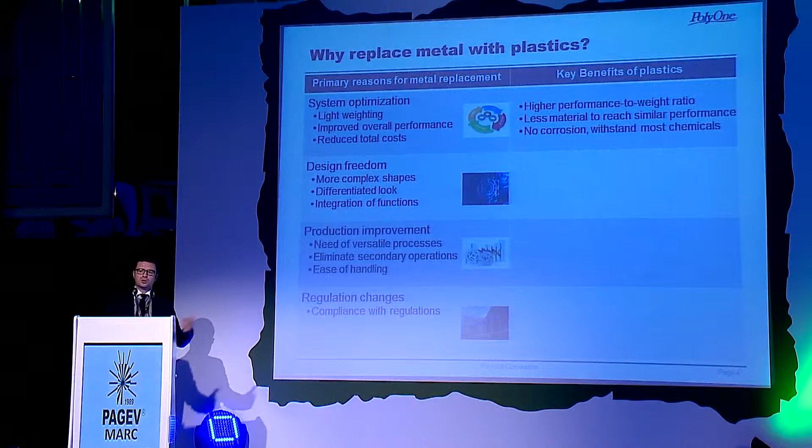Why should we think about replacing metal with plastics today? We've heard about different points today, so I will not go into details, I will just review that with you. First of all, system optimization, which means for us in automotive, lightweighting and more specifically, the optimum performance to weight ratio. For one application, we cannot afford anymore to go for over-engineering or to use a solution that has worked for years and that we say is good enough. There is space for optimization.

The second one, which has also been discussed today, is design freedom to get to more complex shapes, differentiated look, and the integration of function.

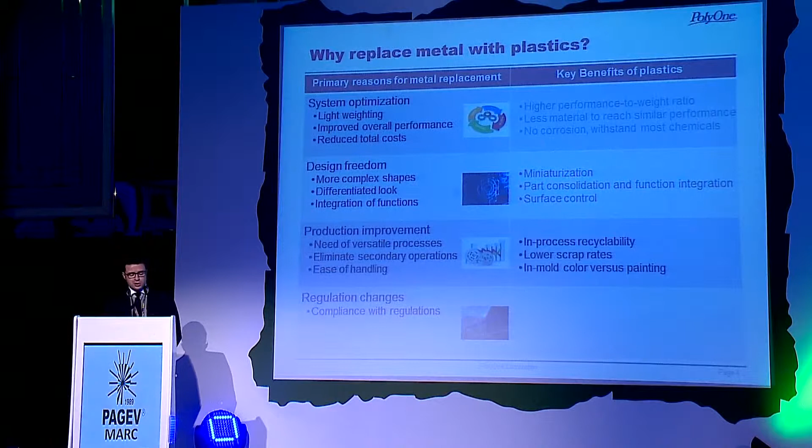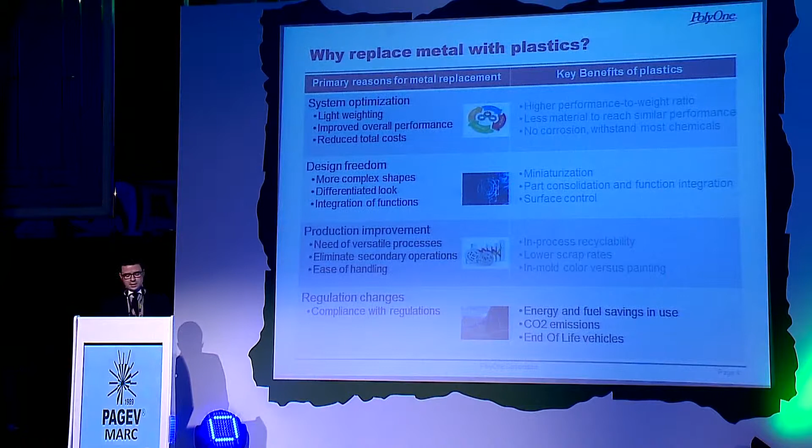The third one is production improvement, where we understand that there are a lot of opportunities to avoid secondary operations by using thermoplastics. And finally, we talked a lot about this today, and that is driving our industry and our innovations - these are the regulation changes, and for our industry, the CO2 emissions and fuel efficiency.

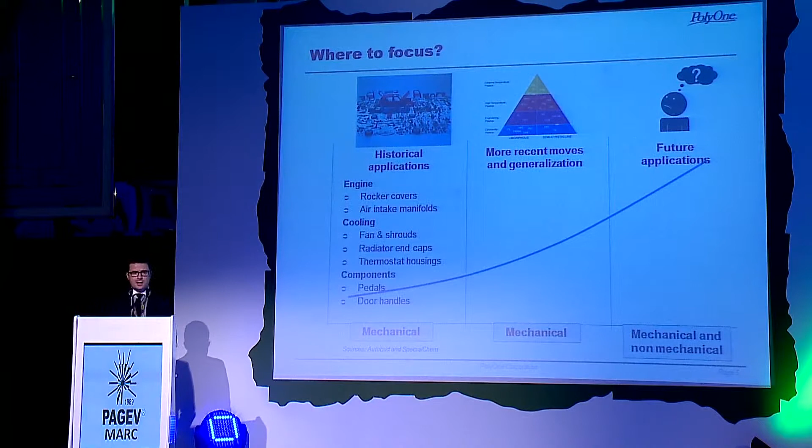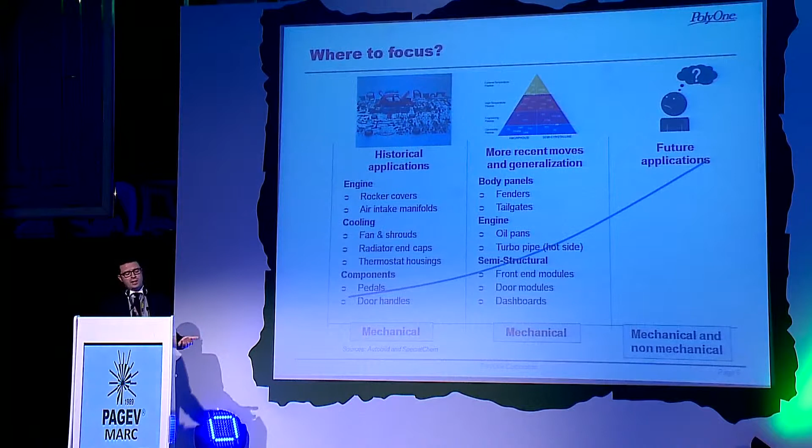Metal replacement in automotive is nothing new. We've seen plenty of very nice examples today. What I want to say with that slide is that historically, the reasons to change from metal to plastics were on mechanical application or semi-structural application. Future applications where there is still a lot of opportunity to make that improvement are still in the structural direction, for sure, so mechanical applications, but also with all the electrical and electronic systems entering the vehicle, those systems bring with them new requirements for the materials.

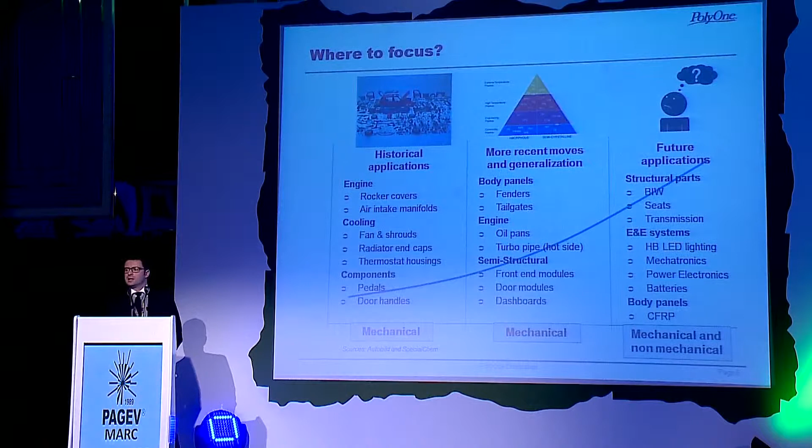Like, they need to work together, all those electronic systems. They need to be protected. It has been mentioned, flame retardancy for example, or electrical conductivity to avoid electrostatic discharge, this kind of thing. And these are the new requirements of those systems in the cars that open new opportunities for metal replacement.

You will argue that plastics don't always contain the same functionality compared to metal. And this is the challenge, and this is the way to come to the point. You need to functionalize the plastics, and current technologies allow us to make that functionalization. If we think about stiffness and impact over a very large range of temperature and extreme temperature, there is some very specific technology that would help you make that change from metal to plastic, and I will tell you a little bit more later on.

If you look at thermal management, for example, where the key property is thermal conductivity, plastics, standard plastics, are not thermally conductive. What if you would make those plastics thermally conductive? Would that open some opportunities to replace metals used for their thermal conductivity? Same for electrical conductivity and electromagnetic shielding. And these are the three examples I will discuss later on.

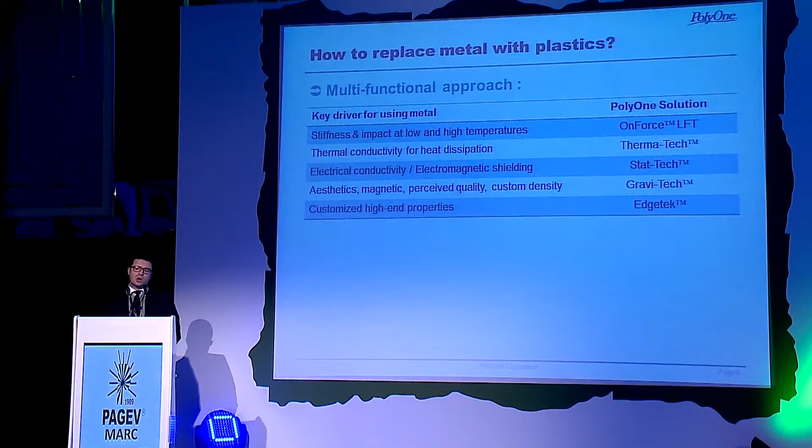For this to be successful, you need also to take into account a second dimension, which is redesign. The most common failure is to say, I have a design which is working for metal, I will keep this exact same design for plastics. You have much more potential to adapt the design to get the most benefit from those thermoplastics.

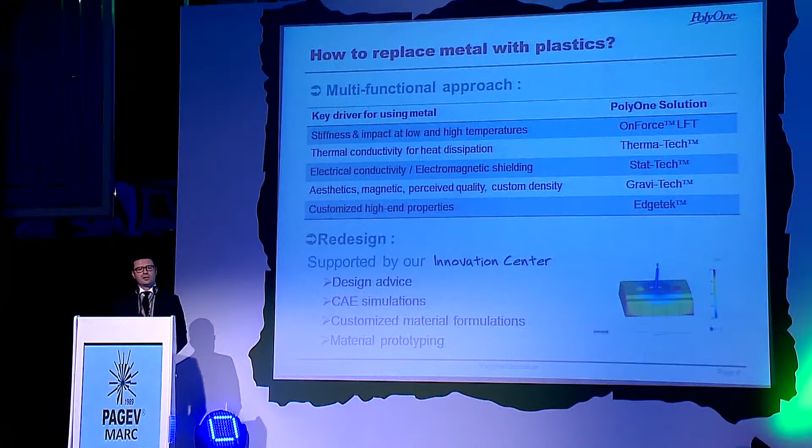Let's go through the different examples. The first one is how to improve and make sure you get a high level of strength with thermoplastics in very tough conditions and temperature. One key technology I want to briefly mention here is the long fiber technology.

For those of you who are not familiar with that technology, it all starts with continuous bobbins of fibers that get impregnated by resins and additives, and they are cut into pellets of 7 to 25 millimeters, for example. Then you injection mold this kind of material, and the fiber length in the part is between 2 and 4 millimeters.

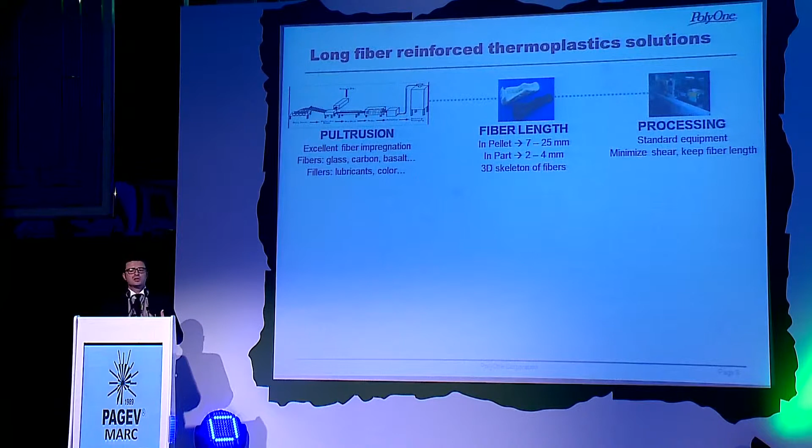You will tell me, so what? What's the difference? In fact, it creates a 3D skeleton of fibers, and this creates a very, very strong structure in the plastic parts.

It brings a very high level of stiffness and also impact properties that are strictly equivalent to magnesium or aluminum. It has very strong creep and fatigue properties equivalent to metals, and they run at extreme temperature, low or high, with a very isotropic approach.

So this is one of the technologies that allows you to think about replacing metal, because in automotive, polypropylene long glass fiber is a technology that has proven that this move from metal to plastic is possible.

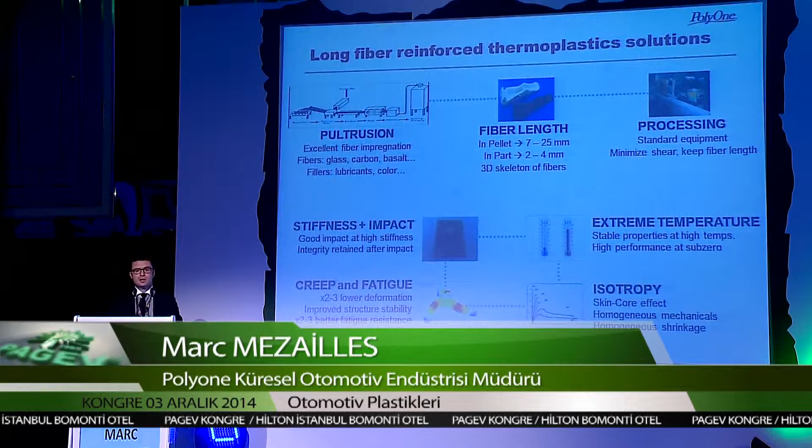But this long fiber technology is not only to be used with polypropylene or glass fiber. It can be used with higher temperature resistance and higher performance polymers, like nylons, PPS, and even higher performance, and also with alternative fibers other than glass, like basalt and carbon.

We heard about these ones. And if you combine all those technologies, the fiber and the polymer, you can get to a very high level of performance, which can help you reach the metal replacement next generation.

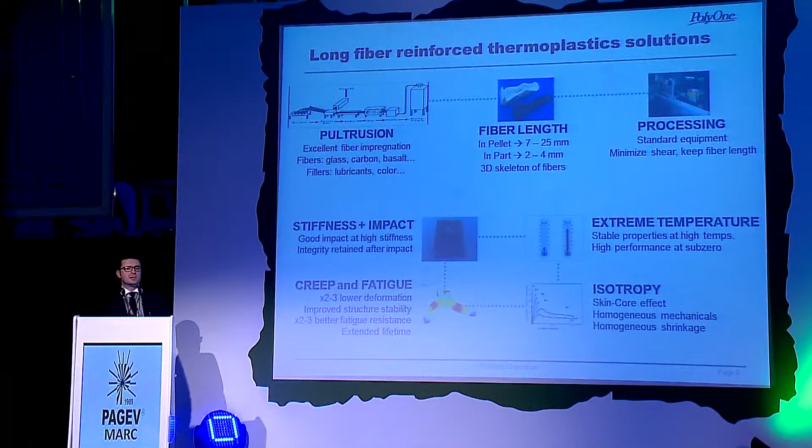This is not an exhaustive picture, but it's just to mention the typical applications where you can think about using this type of technology to lighten the car and avoid the use of metal.

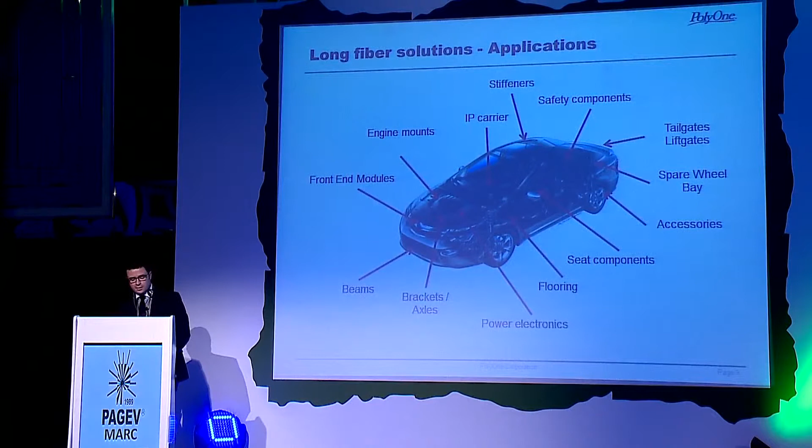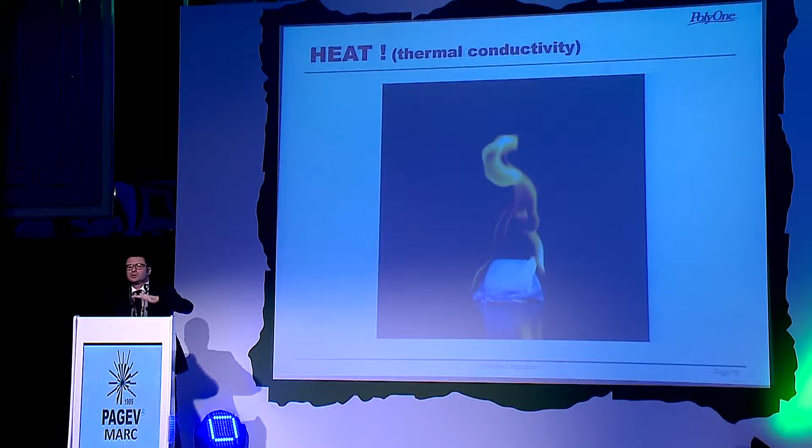Second example of the presentation: heat management. Here, basically, you have two strategies. The first is: I decide to resist the heat. The second strategy, which I'll discuss in more detail, is: I decide to dissipate the heat. I don't want to resist it, I want to dissipate it, to evacuate it.

I'm sorry, it's late, but I had to come back to the three principal phenomena in heat transfer. You have radiation between surfaces, which can be forgotten in our automotive world at the generic temperatures we're talking about.

The two key phenomena are convection, from a surface to a fluid, measured in watts per square meter Kelvin. Here you have some examples of convection factors for gases, like air, and liquids, in free and forced convection. Here in this arena, we are in free convection.

The air is not moving. Behind me there's a big fan, and that's forced convection, the air moving fast. The last phenomenon in heat transfer is conduction, through a solid, driven by the material conductivity in watts per meter Kelvin.

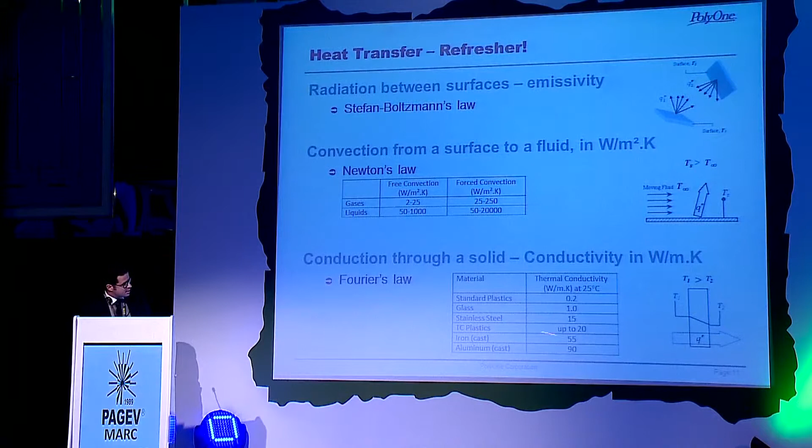Here you have some examples of material conductivity. Non-conductive plastics are at 0.2, aluminum is 90, stainless steel is 15, and thermally conductive plastics can go up to 20 or 25 watts per meter Kelvin.

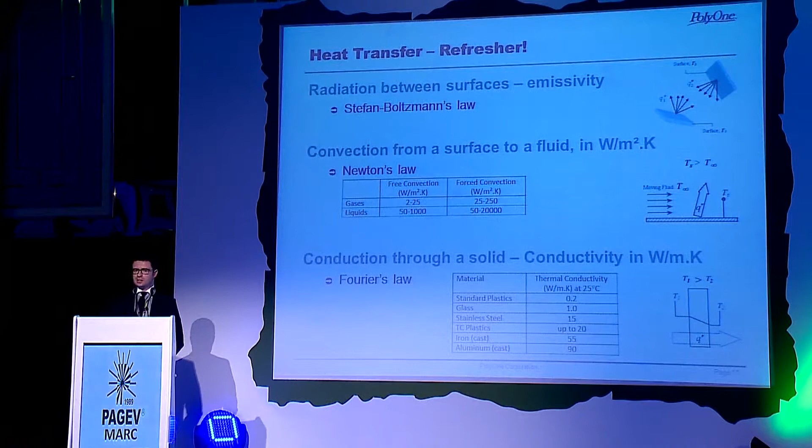At school, we all learned that when there's a heat dissipation issue, use aluminum, it will work. And that's very true, it works perfectly. But is that the optimum performance-to-weight material nowadays in these heat management applications? That's the question I want to ask.

And I will propose a simple example. Imagine a stadium — and that was a risky business here. I was thinking to myself, should I take a picture of a stadium in Istanbul? Oof, that would be tough. If I pick the wrong stadium, I'll have problems. So I picked a neutral stadium here.

Imagine that the fans in the stadium correspond to the heat to be transferred, the joules. The number of exits represents the conduction level, and the public transportation represents the convection level.

Imagine it's the end of the game between Galatasaray and Fenerbahce, and there are a lot of calories in the stadium that need to be evacuated. If you use standard plastic with only one exit, so a very low conductivity level, then you will have a limited heat transfer because you have a conduction issue.

If you take the opposite example, where you have a lot of exits, so typically aluminum, people will be able to go out from the stadium, but the convection will be limited because the number of buses, tramways is limited. So here as well, the heat transfer is not optimum.

The optimum case is where you have a corresponding level of convection, number of buses and trams, and a corresponding level of exits, the conductivity of the material. That will be your optimum engineering for your application.

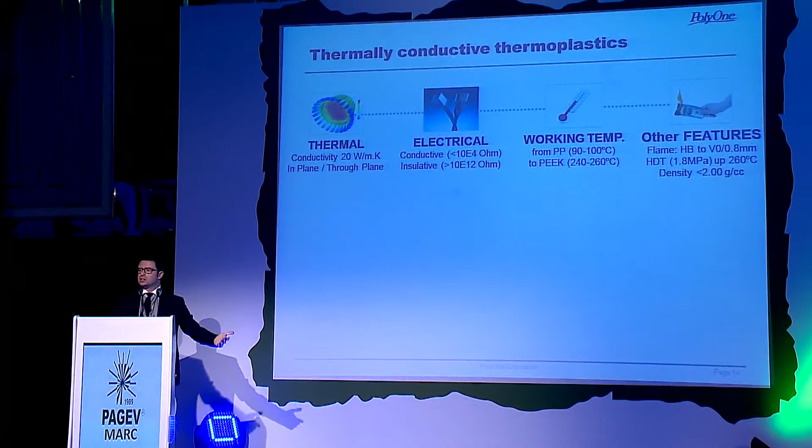This is exactly what they can deliver, on top of additional features like electrical insulation or electrical conductivity, working temperature that can be very, very large depending on the remaining quantity of heat in the application, and also additional features.

For automotive, it is very helpful in electronic engine control units, mechatronics, power electronics. It is of high help in high brightness LED lighting because LEDs are very sensitive to heat, and you need to have very precise heat management.

And most of the time, the headlamps are in the front of the car. This is the area where weight reduction has a very high value. If you could replace aluminum by thermally conductive plastics, you will have a lot of benefits.

It's also a very efficient hotspot reduction solution and can help you in handling fluids like AdBlue for the Euro 6 regulation, and also wiper systems.

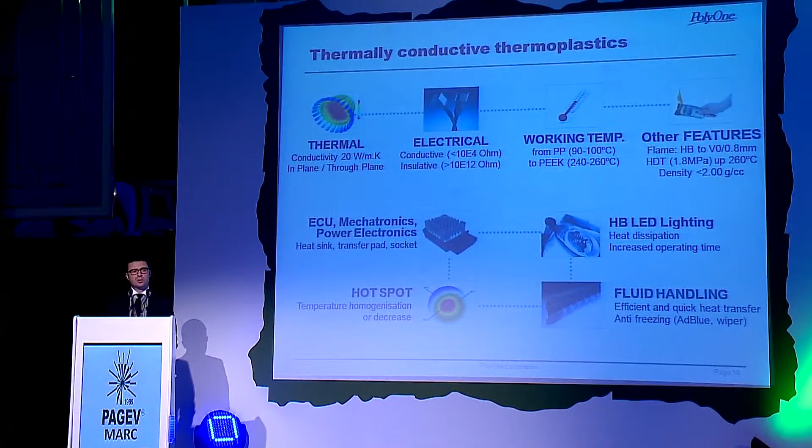Again here, a general overview of the typical areas on the car where this type of technology, heat management, you can think about thermally conductive plastics instead of metal, with much lower densities and similar performance.

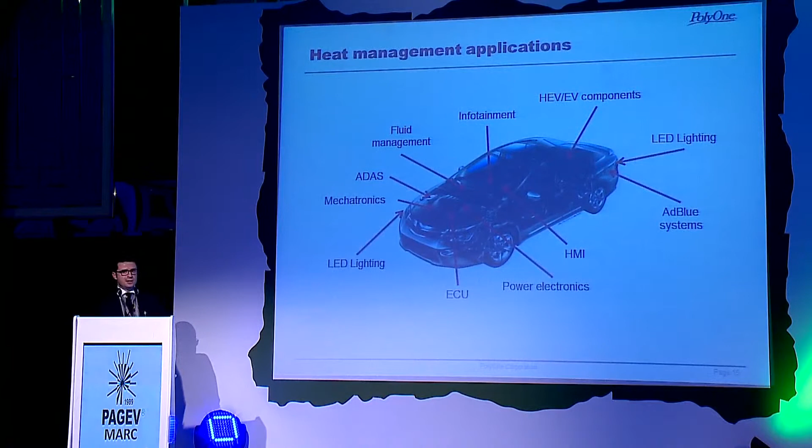I will finish the presentation with the last example, how to manage the electrical conductivity and those electric and electromagnetic phenomena on the car, which can be extremely dangerous and critical given the increasing number of systems coming from the E&E industry, the hybridization from start-stop up to plug-in hybrid type systems.

Plus all the infotainment, the car-to-car communication systems. You need to make sure that your electric and electronic systems run safe and without any interference between each other.

And what is driving that is the electrical conductivity of the material that you would use for your casing or for your application. It can go from antistatic, dissipative, up to conductive, and all this with much lower density than metals. You can do that by controlling the material science and the fillers you use to make that technology work.

And this has high interest in the engine control unit, mechatronics, to control electrostatic discharge and protect the electronics. EMI shielding, to make sure that the systems work together well without interfering with each other.

And the last one is anti-explosion protection when you're dealing with fuel systems on the car in general.

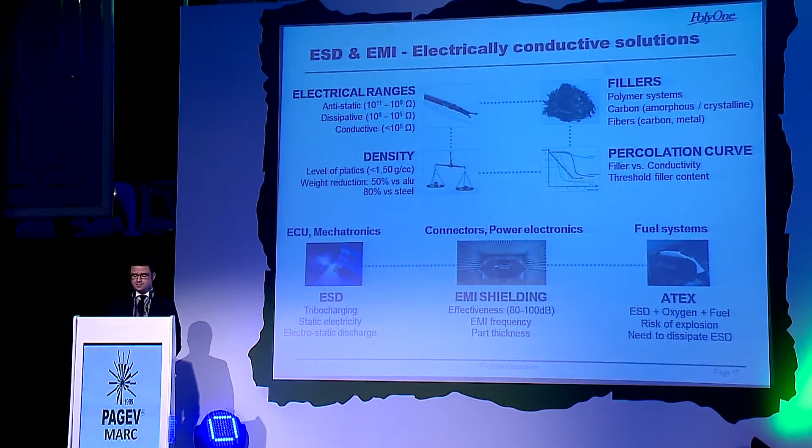With that, I want to summarize and conclude that today the automotive regulation creates additional technical challenges with weight reduction, engine downsizing, and the electrification of the car for sure.

They have a significant impact on material performance requirements, opening metal replacement opportunities for us. Because today, optimum performance to weight is a must, together for sure with appropriate part engineering and part design.

The answer to that is functionalization of plastics, and the customization of specialty thermoplastics are opening valid alternatives to metals in numerous automotive applications.